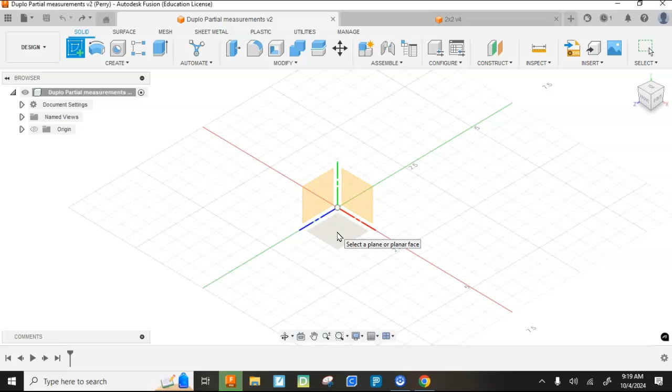I've already labeled it Duplo partial measurements, and I'm going to use the least amount of measurements possible. So the first thing I'm going to do is draw the bottom of the Duplo. I'm going to sketch, and choose the flat plane at the bottom here. Then I'm going to draw a rectangle representing the bottom of the block.

I'm going to use a very special rectangle, called the center rectangle. So after I hit rectangle, I come over to the sketch palette and tap center rectangle. I'm going to place the center at the origin, which will set me up to use symmetry later.

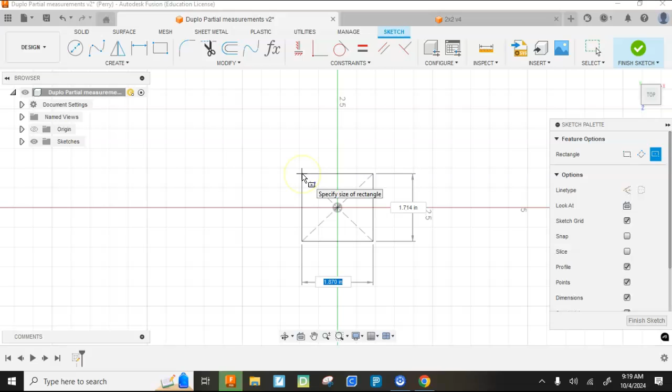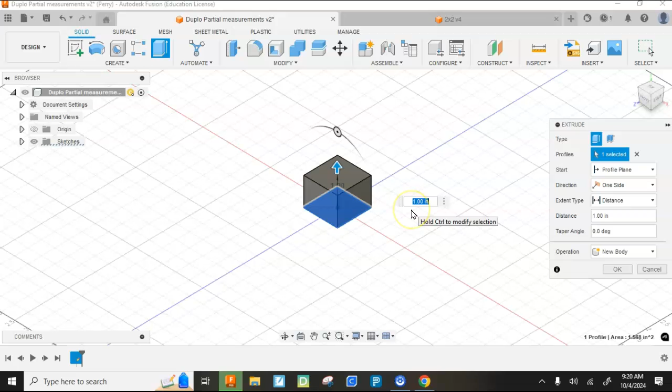My dimensions for the width will be 1.252, and my dimensions for the depth will be 1.252. I'm going to hit enter and finish that sketch, and then extrude it up a height. That needs to be 0.756.

So there is the beginning block. That's kind of the shape we see. It'll have some studs on top, and then it'll have some things on the bottom. I'm going to go ahead and shell it out now.

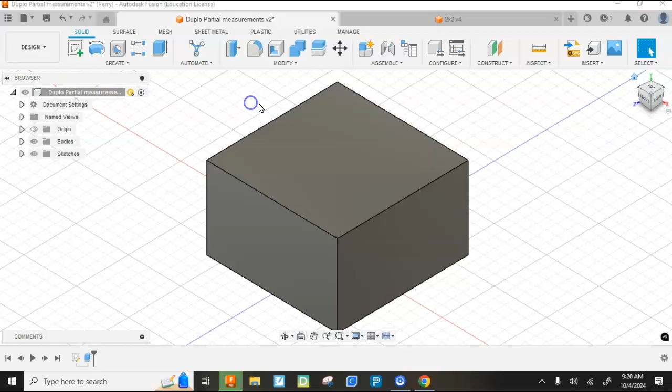So I'm going to hit modify, shell, and then come with my navigation cube. I'm going to come down here to the bottom, tap this bottom plane, and then just type 0.1.

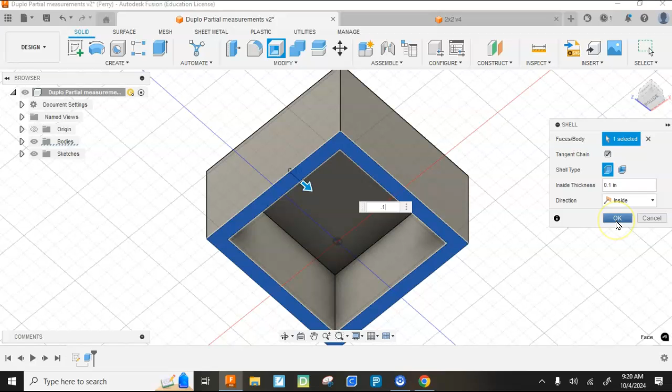Now that is thicker than the actual Duplos because our plastic, frankly, isn't as strong. And this is a working model. I want it to work and not break, so I'm going to make it a little thicker there.

So I have the basics. Now I need to go add the things that help them come together. The first thing I'm going to do is model the studs on top. There are 4 studs around.

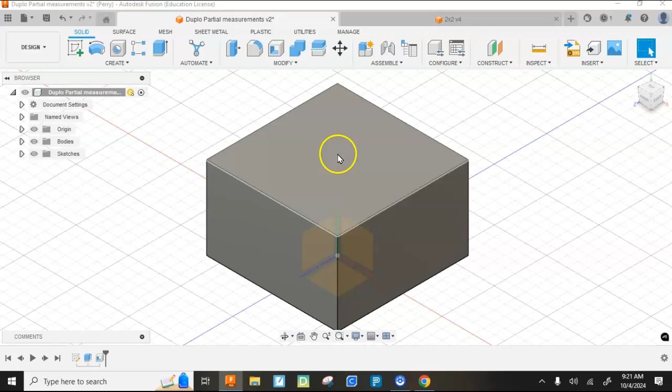I'm going to do one and then pattern it around this axis that comes up through the middle. That's why it was important to use a center rectangle centered on the origin. So I'm going to come over here and turn off the origin.

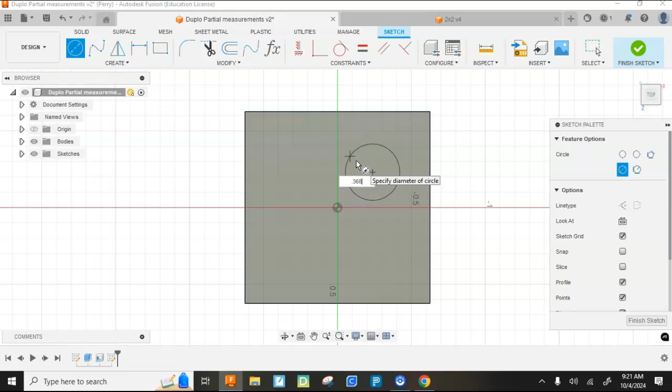I'm going to come to the top surface and put the dimensions for one stud. The dimensions of the studs themselves I have measured at 0.368, and I know that varies a little bit from person to person, but I know this one works. I'm going to go ahead and hit enter.

Now that is the right size, but it's not in the right place. So I need to put the dimensions from, so I'm going to dimension, sketch dimension, tap the center of that circle, tap this line, and then drag it out here just so it's easy on my eyes. I want to make that 0.309. I'm going to hit enter.

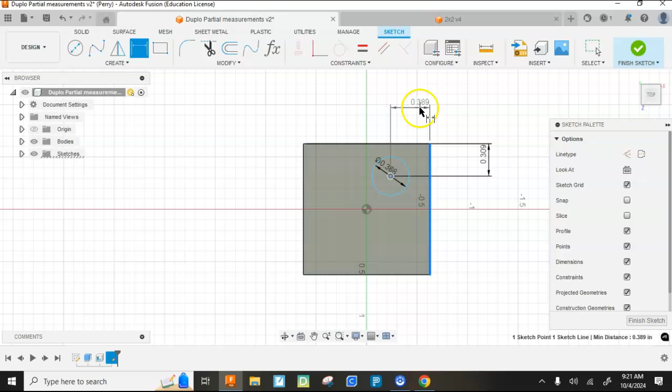And while this is still highlighted, I'm going to tap the center of the circle and then this edge, and I want that to be 0.309. I'm going to hit finish sketch, and extrude that up 0.2 inches.

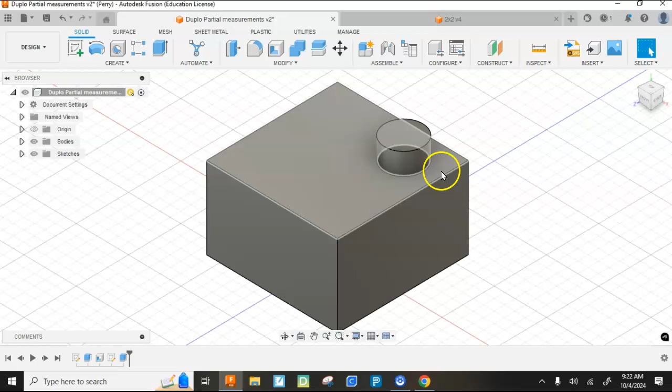I know that it is a little less than that, but it doesn't run into anything, so it's quite okay. I'm going to hit OK. I'm now going to come up and put a little chamfer on this top.

So as this oval, I guess it's a circle representing the top, is highlighted, not that face, not this, but that right there. As that's highlighted, I'm going to right click and hit chamfer, and put a tiny chamfer.

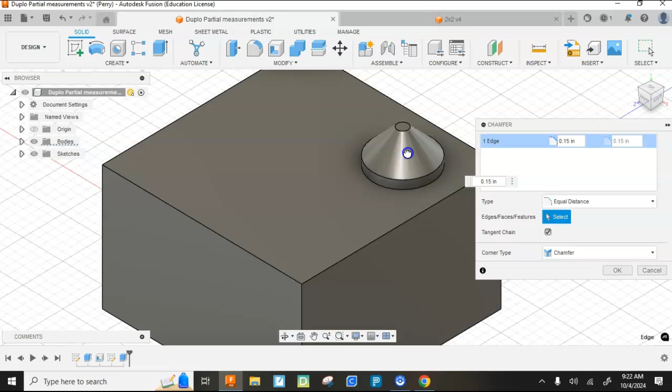0.05 is what I'm going for. So I'm going to drag it in or just type 0.05. And what that does is serve as kind of a shoehorn to help this find center in the block above it. Alright, so I've placed this.

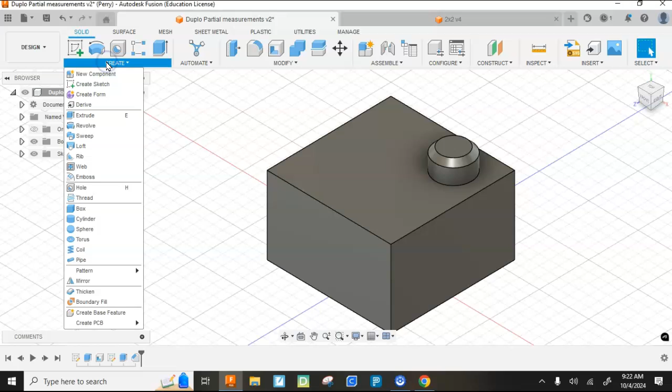This is the right size. It is the right location. Now I'm going to create a pattern. So I'm going to come up here to create pattern. This is going to be a circular pattern, and that circular pattern is going to go around that.

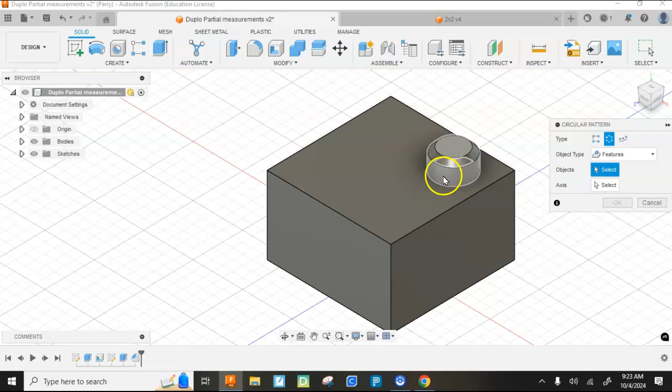Right now I can't select just the stud because object type says bodies, and that's all one body. I'm going to come up to features, hit the drop down, select both the stud and the chamfer because I want to do the least amount of work.

For my axis, all I have to do is select that one, and it defaults to 3 of them. I actually want 4, so when I come over to quantity and hit it up to 4, you're going to see that now looks wonderful.

The reason I've called this Duplo partial measurements is because that's all the measurements I'm going to use. I've used this measurement, 1.252, which is the same as that one, 1.252. I've used 0.756, then I've used the 0.368 and the 0.309. I'm not using any more measurements.

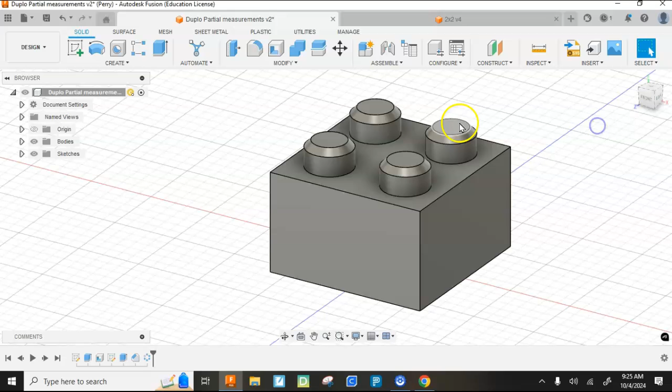I'm going to do the bottom with constraints. So here I go. I'm going to first put the center peg that comes down and nuzzles between those. That is going to be drawn on the bottom inside of this block, so I'm going to choose that as my plane.

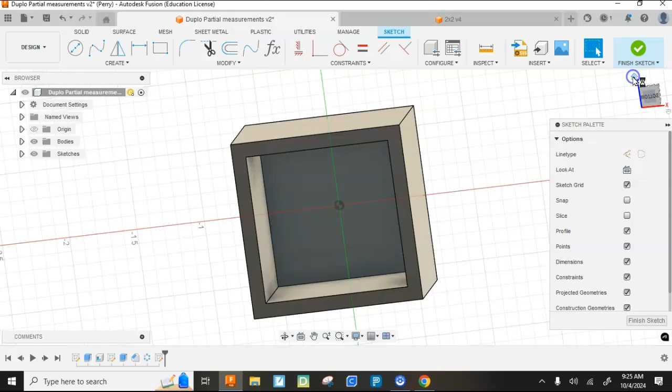Now I need a little more information, so I'm going to go back to the isometric view and come over to create. I'm going to project this circle down, hit OK. Now when I go back to the bottom, you're going to see that's projected too.

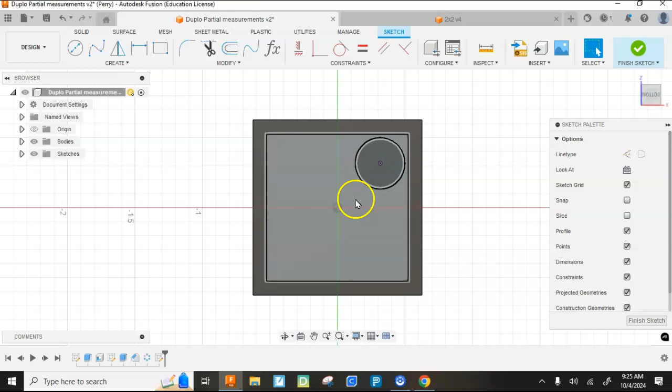And what that allows me is to constrain. So now I'm going to put my center circle like that, and then I'm simply going to tell it to be tangent. I'll come to constraints, hit the constraint button, tap this circle, then this circle, and you'll notice that now that is tangent to it, so it's going to reach out and kiss that one. Because of symmetry, it's also going to kiss this one, and this one. So that's going to hold in there snugly, and it'll be the perfect size.

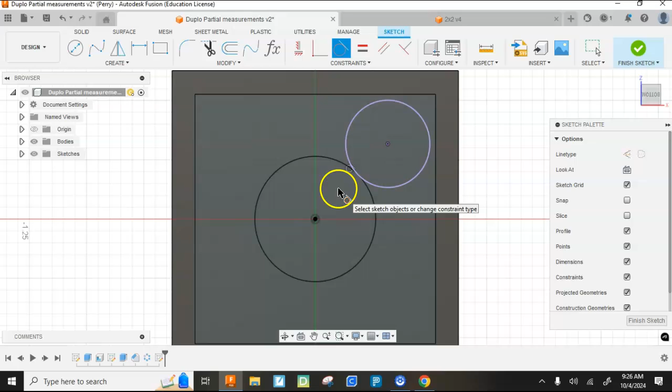I don't want to print this solid as I extrude it down, so I'll use an offset from that, and I'm going to put another circle that is negative 0.1 and hit OK. So now that has two circles there. What I'm going to do is extrude the donut, so I'll hit Finish Sketch.

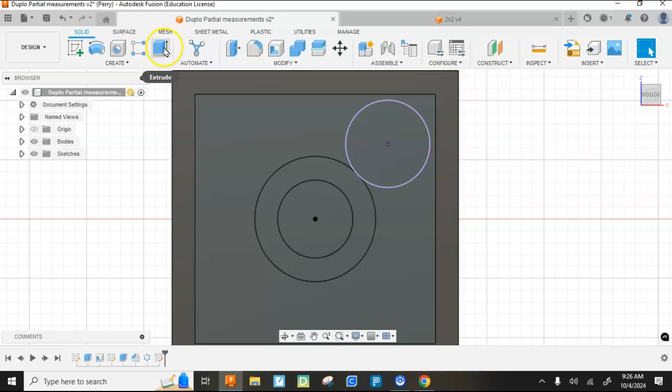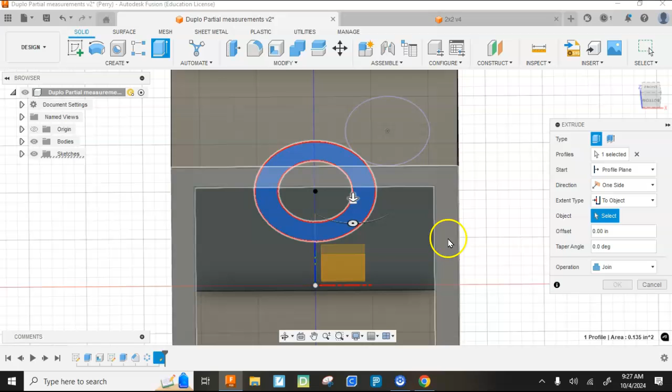I'm going to hit Extrude, and then I don't want to do any more math, so I want this to come down. I could obviously do the math, but rather than the extent type going a distance, I'm going to have it come to an object, and then highlight the bottom of this. So what that does is make it come down and be flush with the bottom, that's where I want that to come down to.

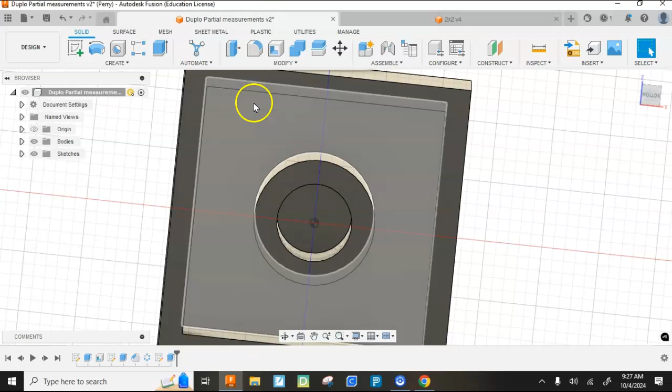Now, this would almost work. In fact, it would fit on there, but it would wiggle, it would turn side to side. If you look at the bottom of the Lego, there are 3 points of contact on every stud. So this is what I call fins, and I'm now going to go to working on the fins.

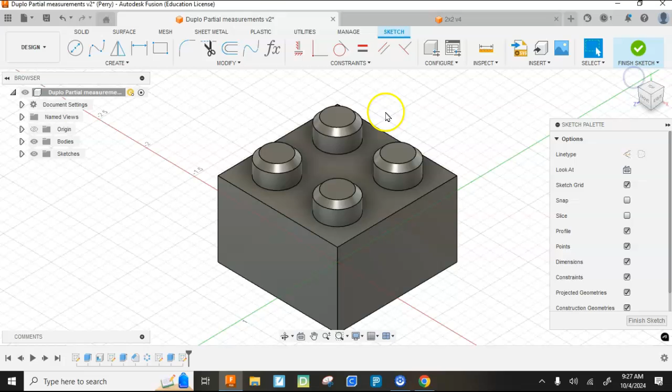So that's all going to happen in one sketch. This sketch is going to be placed on the bottom edge, and then I'll extrude upwards when I want to make it. Again, I need to project, so I'm going to project this circle right here down. Any of them will work. I'm going to hit OK.

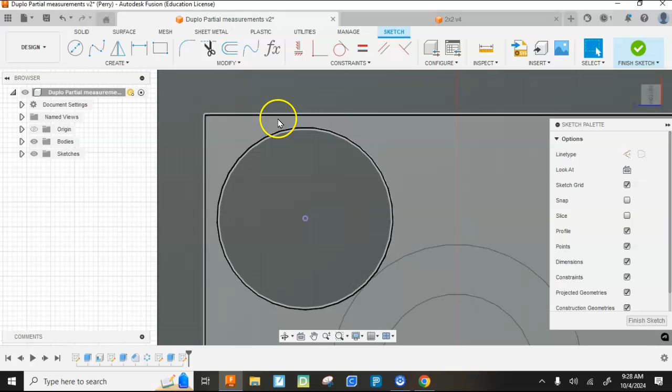Come back down to the bottom view, and then what I need is a little piece that holds that. It could be a rectangle, but I use little arcs because, again, I'm after function with this. So I'm going to create a 3-point arc, just tap this line, bring it over a little bit, and bring it up so I got a little something that's going to look like this.

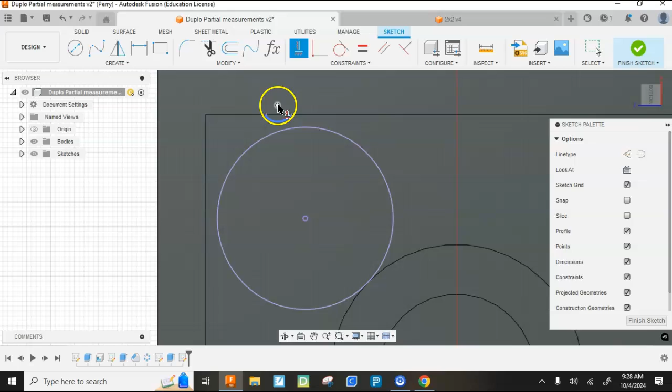Now I'll constrain this into position. I want this to line up directly above that, so I'll use my horizontal vertical constraint. I'll touch this dot here, which is the center of that radius. If this arc were a whole circle, that would be the center.

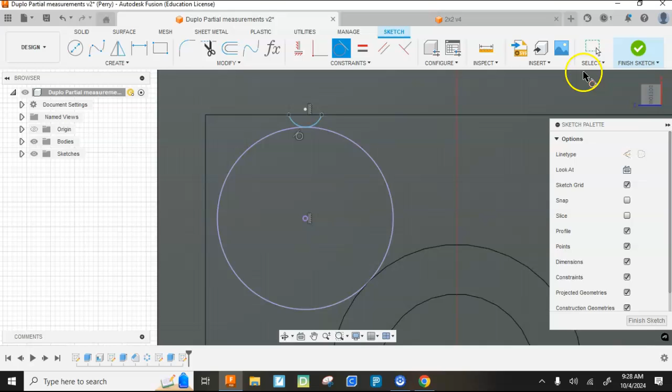I'm going to tell that to be centered over that, and it'll move into position. Then I'm going to use tangent as a constraint to tell this to come out and touch that at one point, or kiss it. Now I have one, I need one over here.

Rather than doing the same thing, I'm going to use reflection. So I'm just going to place a 45-degree line from corner. I've got to be careful that I lock onto the corners. If you don't lock onto the corners, it's not going to work. When I get right there, that little box pops up and I'm locked to it.

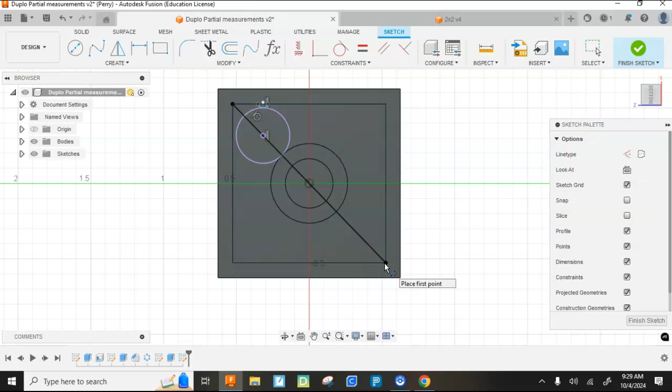So now I will mirror that right there, and for my mirror line I'm going to use the one I just created, and I'll look, and that is indeed perfect. I'll hit OK. Now I'm going to want to create a circular pattern.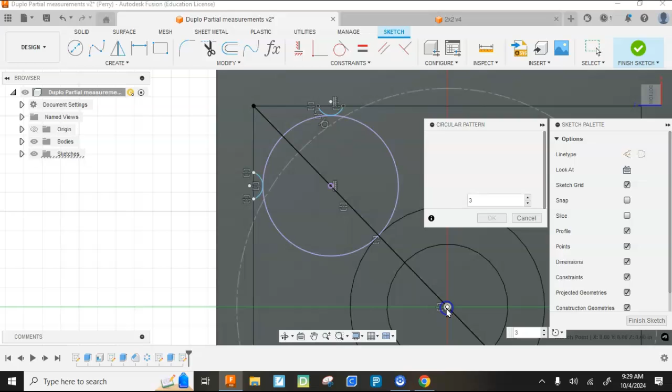For my objects, I'm going to choose both this fin and this fin. For my center point, I'm going to use that origin, and then I need to make 4 of them. Now you'll look, there's in each corner it's got 2 of them. I'm going to hit OK, and now I will finish my sketch.

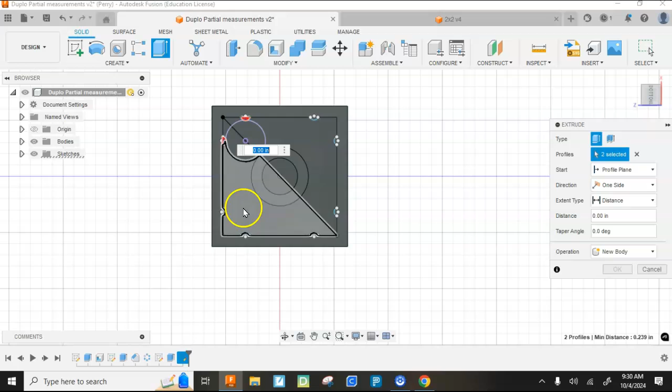Now I'm going to tap Extrude, and then I'm going to go around and choose the inside of these objects.

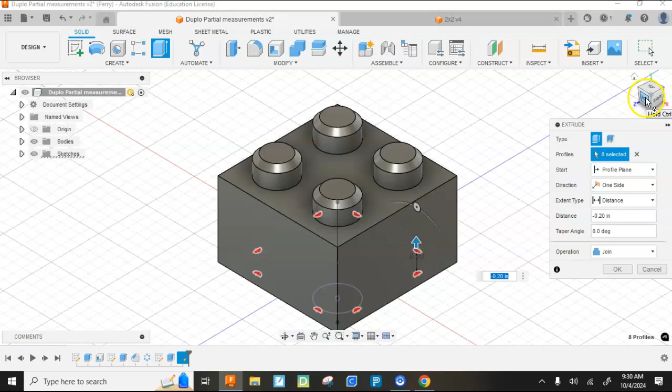All right, I'm going to go back this way so I can see, and what I want to do is just bring it up 0.2 of an inch. I don't want to bring it all the way up because that would just waste plastic. The studs below only extend up 0.2 of an inch, so it doesn't make any sense to run them all the way up to the top.

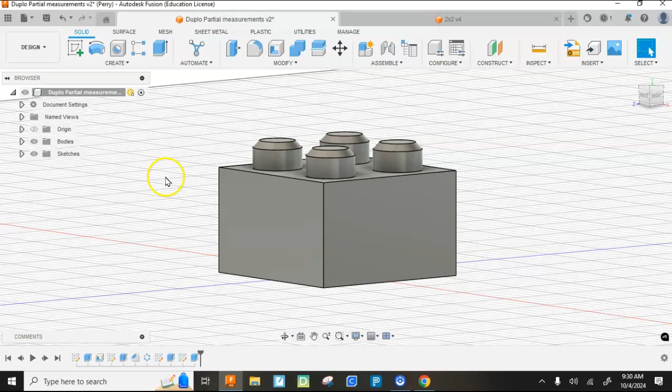I'm going to hit OK, and now I have a fully working Duplo that functions perfectly. The last thing I want to do is add my name, or my initials in this case. So if you haven't done this yet, this is what you're going to learn.

So I'm going to sketch on a face, a side face. I'm going to start a sketch. Now I'm going to create text, so I'll come down to text.

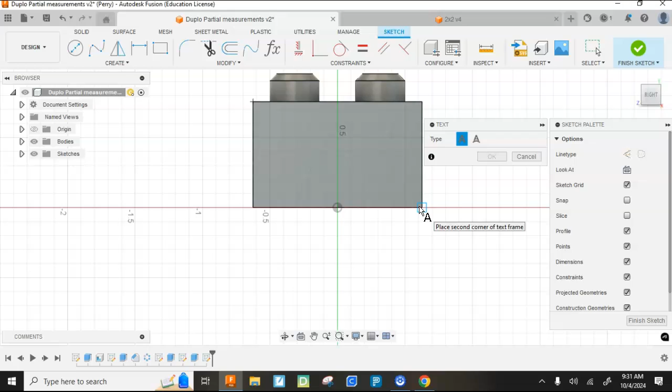The way this functions is I'm going to come up to the upper left-hand corner to start my text box. I'm going to left click. I'll come down to the bottom corner, left click again, and now it wants text. So I'm going to enter my initials, CDS. Now I'm going to center it horizontally.

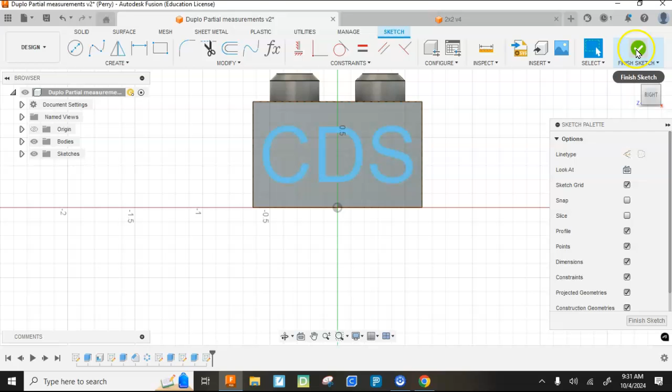I'm going to center it vertically and hit OK. Now I'll finish my sketch. Now I'm going to go to Create, Emboss.

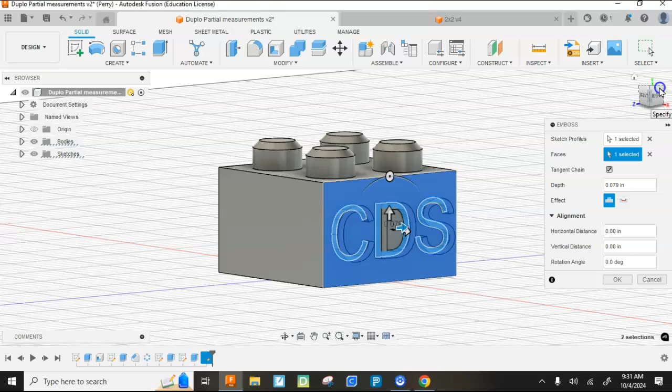For the sketch profiles, I'm going to highlight CDS. For the face that I'm doing it onto, that's this face that it's on. And then rather than embossing, which would bring it out and possibly run into a block if I try to put a block beside it, I'm going to deboss it. And what that means is it goes in. Since this is 0.1 thick, I'm going to go half that distance of negative 0.05 and hit OK.

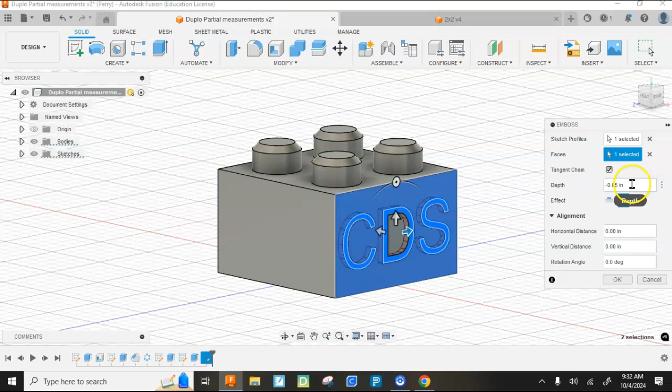So now that will be pushed in. I'll save my document now. It's telling me to save my document now, so I'll do that. All right, at this point I am done, so I'm ready to—I saved it.

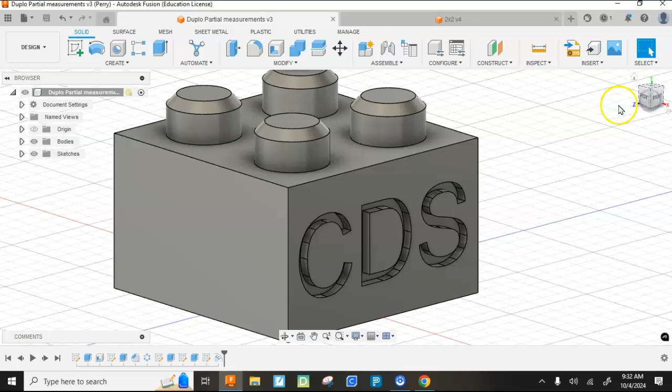Now I would go to export. In the export, I would change this to an STL. I pay attention to where it's going—it's going to my downloads folder. So I'm going to hit export, and that's going to take the STL to my downloads folder.

Now I would open up Google Classroom, add a file, browse, since it's not going from your Google Drive, go to the computer's downloads folder and attach that file. So again, I'm going to add that file and then hit submit, and then this will be printed for your real test.

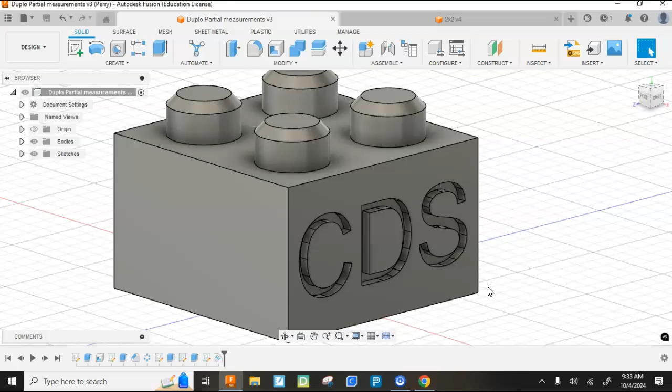I just noticed that the D didn't perform as I'd like it to. It's okay for me, and certainly I wouldn't criticize anybody for turning in a D missing—I don't know what that part of the D is called—but this is how you would lay out a Duplo 2x2.